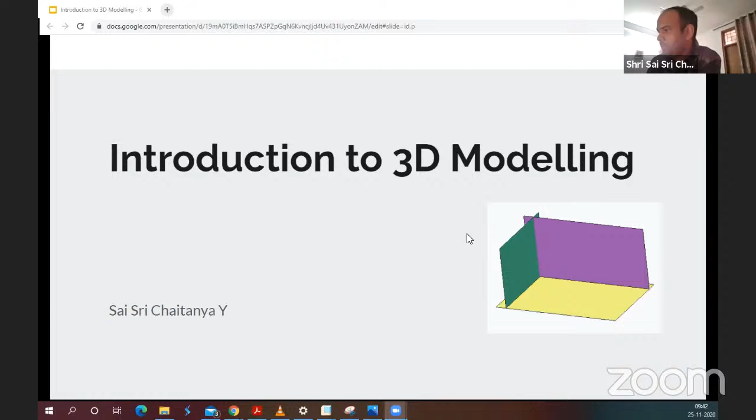3D modeling - what we know is from movies to manufacturing, 3D modeling is incredibly useful. There are hundreds of different 3D programs, and each has a specific application. 3D modeling allows engineers, designers, craftsmen, or entrepreneurs to flesh out their ideas before they come to reality. Most of the objects you see around you in this world right now were first developed as a 3D design using 3D software by engineers or designers, before they were actually brought into the physical world.

So 3D design is extremely important for the same reason - for engineers, architects, be it mechanical, civil, or architectural, or even industrial designers, and new ideas that are drastically coming up. We know there is no relation with the degree associated when you want to be innovative, so this is a helpful tool. Many people use 3D CAD programs to design things before building them - it's being done all the time. By the basic definition, it is the process of developing a mathematical representation of any surface. Surfaces can combine to form a volume, they can combine to form a solid, which can be inanimate or living, and something that can be visualized in 3 dimensions.

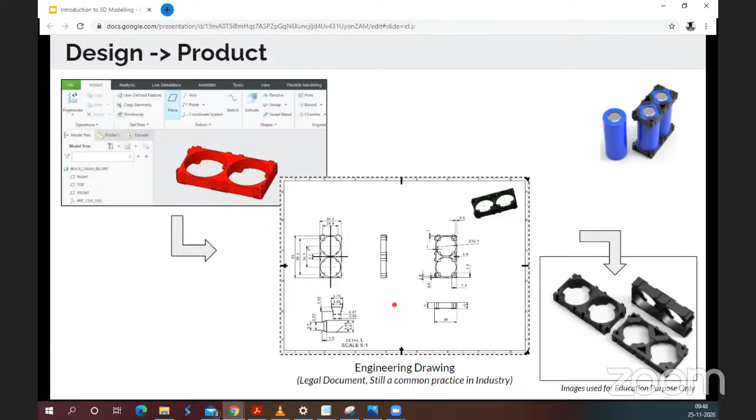So this is typically how design takes shape into a product, right? We imagine that for today's generation, when they pick up a component or something, they know that there is something going on by the design. So there are some people who are doing these designs, and there are people who receive these designs in the form of a drawing or some kind of input, and they manufacture it and bring it to the real world.

So what you see in this picture is, let's say, a battery holder. This was a small project that I was working on with some of my colleagues. On the top right side, you can see the application of it. These days, electric vehicles are quite popular and getting more popularity. So this is a battery holder that goes inside your electric bike or a scooty.

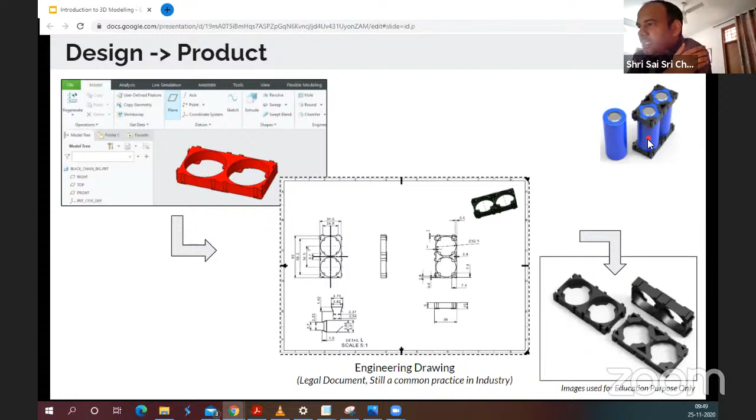So there is a stack of cells that is put inside. So what we see is someone made the 3D, and we have an engineering drawing. So I am also saying that.

So this is an engineering drawing. It is considered a legal document and is still very common in the industry. The 3D softwares are going to a next level where they want to eliminate having a 2D drawing as well. They want to communicate all the technical information on the 3D model itself. That will take some time, and drawings still exist because when entering into contracts with suppliers and regulatory boards, we want everyone on the same page, and this is a good way to sign off our designs.

So what I want to represent here is there's a big transition from design to product, and 3D modeling assists a lot during this process. You have to interact with the engineering teams within yourself, whether it's simulation, labs, or prototype guys, and also cross-function teams like procurement, manufacturing, quality, and plant, and so on.

So just to add up, the next slide could be a bit confusing. Please bear with me, because some of you may not have, or are still pursuing, an engineering background.

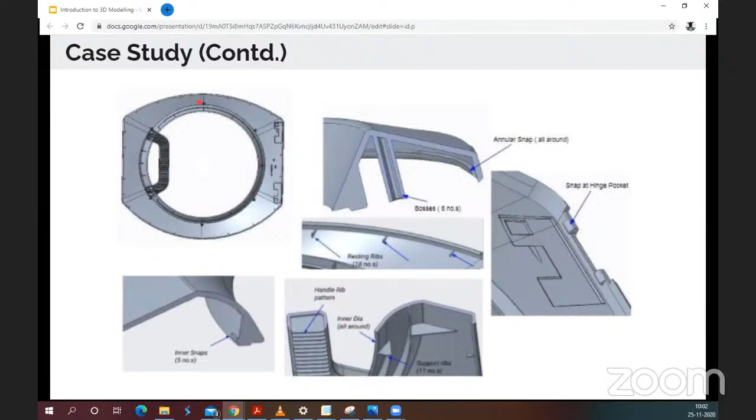So this is a snapshot - please bear in mind we are using this only for educational purposes. Let's say this is a 3D model that was developed, and this is the area where we are trying to develop the screw connections. We know this is going to get a grab load from the user - he's going to grab the handle over here - and we are going to develop some stresses in this region in the back, which is where the screw is exactly located.

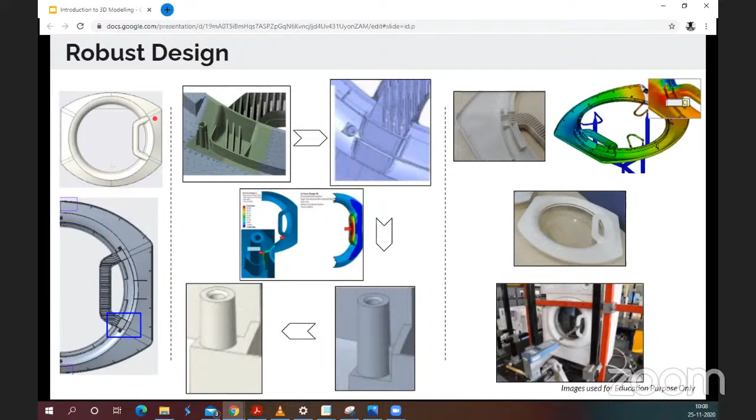The simulation is there inside. It requires a different licensing, but it is also included in the basic pack. What they have done is made these softwares so that they can speak with each other. They have given us some basic simulation features that you can do directly in your 3D modeling environment, especially in Creo. You name any 3D modeling software, it is possible. These days, simulation is possible.

That's it, one question. Okay.

So the next slide speaks of how a typical parametric 3D modeling software looks like, the process, what we do inside. So we are again going back to our topic of 3D modeling. Generally you have a 2D sketch in the start.

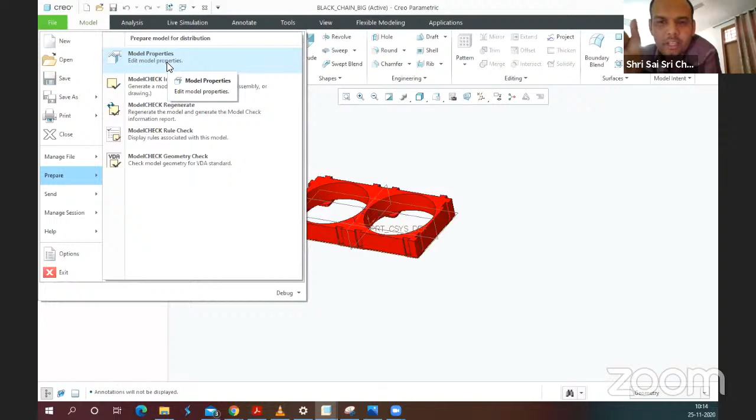Every alloy, if you are speaking of a metal, is associated with a standard, AISI or DIN. If you are speaking of a plastic, the supplier will have their own technical data sheet. If you see, this material right now is not assigned, and by default you get a list of components in the library.

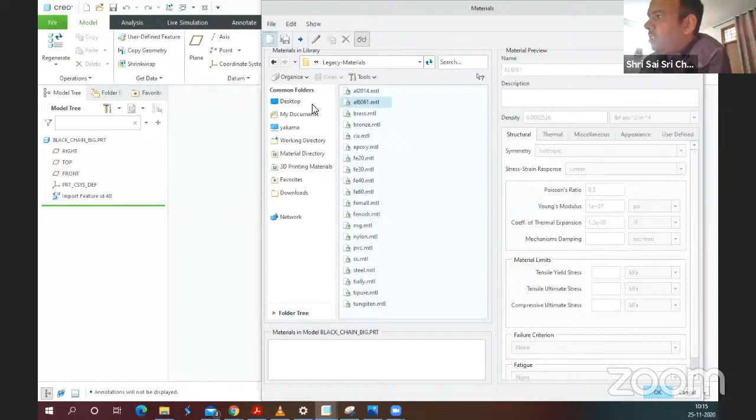Our friend was asking about aluminum. We have two grades of aluminum here. Either we can choose from these two if sufficient, or since you are speaking of a specific alloy with a particular property, you can also create your own new material and assign properties from your technical data sheet. The density, Young's modulus, thermal properties, hardness, miscellaneous like bend factors - all of these can be defined, saved to your library, and applied to your model.

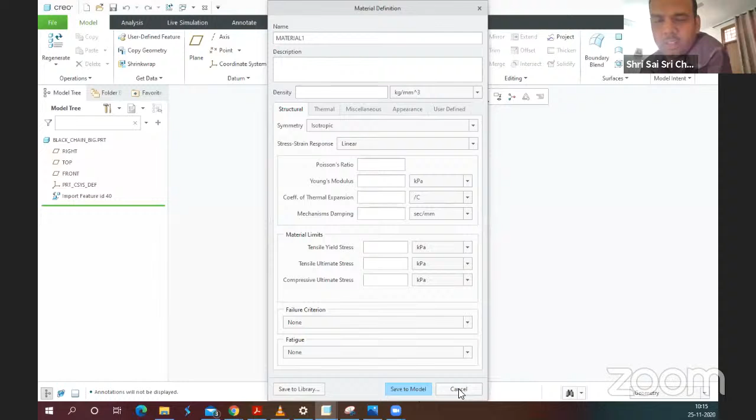Let's say in this case I know this is a plastic part, let's say I give it as nylon. So you see nylon's density - right now the units are coming in terms of pounds. We may want to switch it over to MMKS, the metric system.

Yeah, so it is possible. Whenever there is no material defined, you generally seek the material data sheet from the supplier, or look at the standard, and you are able to create or replicate those properties in your 3D modeling environment.

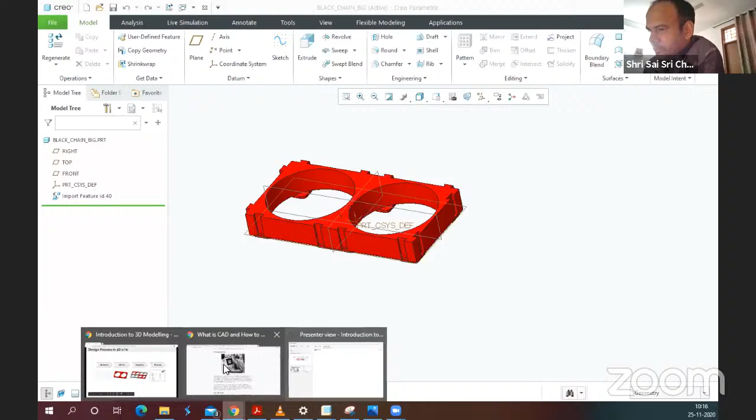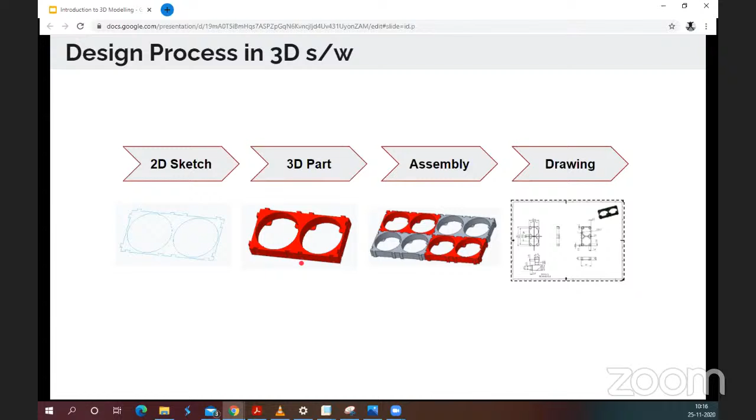So this is where it's going to get a bit more detailed now in the session.

I'm trying to replicate what elements are involved in a 3D modeling software. Part of the reason for this session is to make the audience aware of what kinds of tools are available in the field. This isn't software specific. The environment, aesthetics, visualization, or UX may differ, but the elements remain the same. Some options appear forward, some go back, but the language you speak will always remain the same.

Before we start a 3D modeling software, when you say file new, you get these kinds of options. On the left side, this is how it looks in Creo, and this is how it looks in Autodesk Inventor. You can create a part, an assembly, or directly start with the drawing. In the drawing, you can use sketches and start making views, projecting side views or front views depending on the need.

Typically, what kind of extensions are there? For a part we have .prt, for an assembly level we have another extension. What is a part? It's the geometry of an individual part. We can also create a sheet metal part or a part model at this point in many 3D engineering parametric softwares.

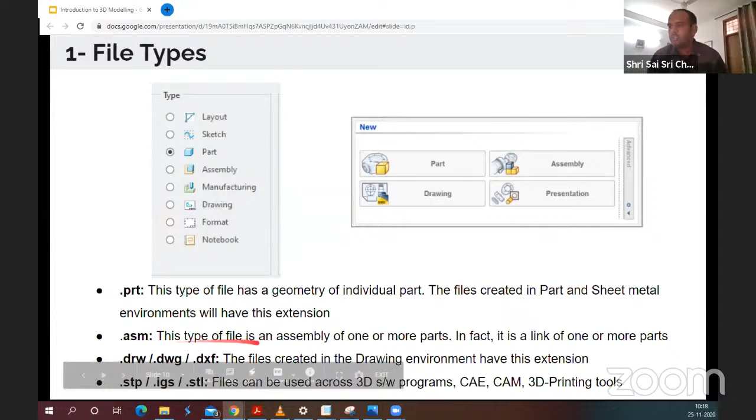Next is an assembly, which is .asm kind. Typically this is an assembly of one or more parts - in fact, it's a link of one or more parts. Next you can see drawing, which can exist in .drw, DWG, or DXF files. The files created in the Drawing environment have this extension.

Last, let's say you're developing a component which uses screws and also needs standard screws, nuts, or bolts. These are standard components already available in the market - you can pick them off the shelf. Suppliers, along with data sheets, these days let us directly download 3D models from them. As an individual you have to cater to all industries irrespective of what 3D modeling software your organization uses. So you have formats like .stp and IGS, which are directly downloadable and importable into your 3D software.

I also know the industry works across platforms - say, Creo to SolidWorks - you want to transfer a model. So what I do is export the model I made in Creo as a STP file or IGS file and share it with a colleague using the other software. These days they're also developing interactions where they can directly use the core .prt file and import it into the other 3D engineering software.

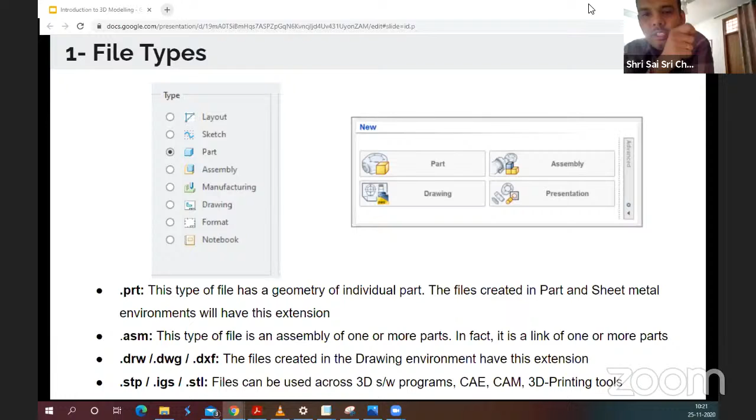Coming to the porous aspect, this is also getting popular in additive manufacturing. You do a normal modeling and assign it density. When going for 3D printing, the conversion software has an inbuilt facility that can make components hollow or porous, and build them in layers in that format. For something like a bone, you might have to start slice by slice, but you could also address the same issue by first building a normal 3D model, assigning the density of the bone, and then exporting it into a software where you can impound properties like porosity. But yeah, good question.

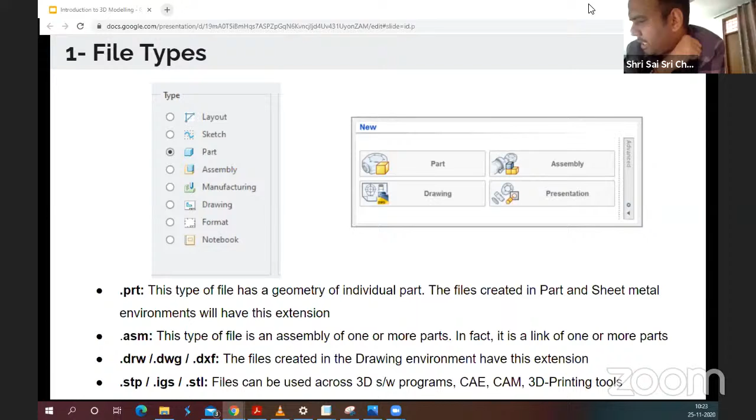So going forward, I want to also give you a fair representation of the software whenever you open it, how it looks. This is particularly the Creo environment, but the options may vary when you are using software like CATIA, SolidWorks, Solid Edge, or Inventor. You always have a graphics toolbar with the 3D model, a model tree which captures the feature history, and the toolbars with different tools. I'm going to cover these in the upcoming slides.

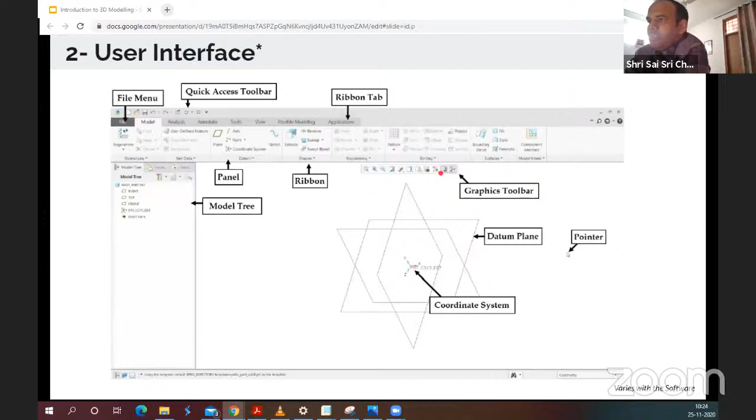It allows you to view, edit, or document your CAD files. The 3D model itself sits in the center of the environment, and the tools you want to use to manipulate the files—let's say you want to add a radius, add a chamfer, or cut—are all located in this window. When using a different program, the tools may be in different places, but we will go through the most common tools in the demo.

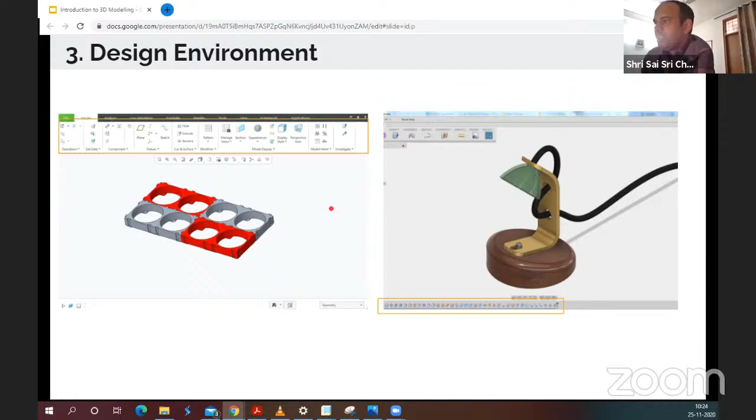Next is the viewing tab, typically also called a graphic toolbar in Creo. It has the commands that allow you to zoom in the model, rotate the model, or change the view of the model—you want to orient it in a specific view, say front view or side view. All these things are possible here.

You can also switch the edges, render the model, hide the solid and only see the wireframe or the edges of the component. At the same time you can switch on the axis, coordinate systems, and planes. I'm going to take this forward because it's an important aspect to understand in 3D modeling software.

Next is the feature tree, also called the model tree. It displays all the types of operations in the sequential order in which they were built. If you see this very simple model, I have created let's say 5 features.

The first feature caters to the top plane, the yellow portion. The second caters to the right plane, the green one. And the third caters to the front plane, the pink one. These 3 planes are actually forming your 3D space.

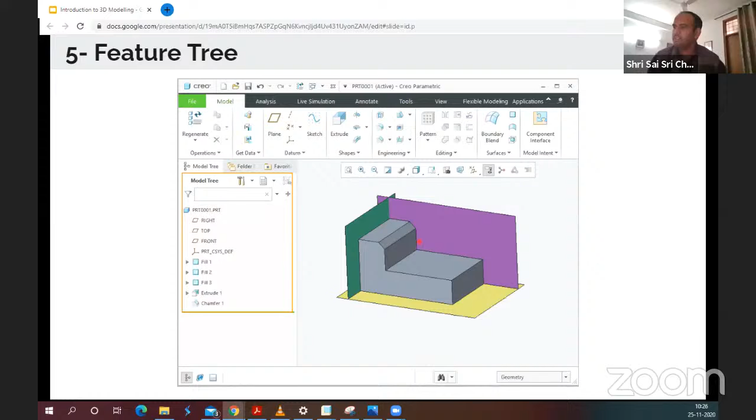You have the axis where the 2 planes get intersected, so you get the x-axis, z-axis, and y-axis, and where these 3 datum planes intersect each other, we have the origin point. This is an important piece of 3D software because we use these planes, points, and axes as reference geometries.

You can locate your part and features with these planes in the 3D space. This forms the 0,0,0 of your component.

The CAD programs work in a Cartesian coordinate system. So any component, surface, or edge can be represented using 0,0,0—the location of this line or point with respect to X, Y, and Z. The reference geometries we create can be used for sketches and also features when designing the part.

Any questions here? This is actually the base of any 3D modeling software, so it's important for us to understand what is a front plane, a right plane, and a top plane.

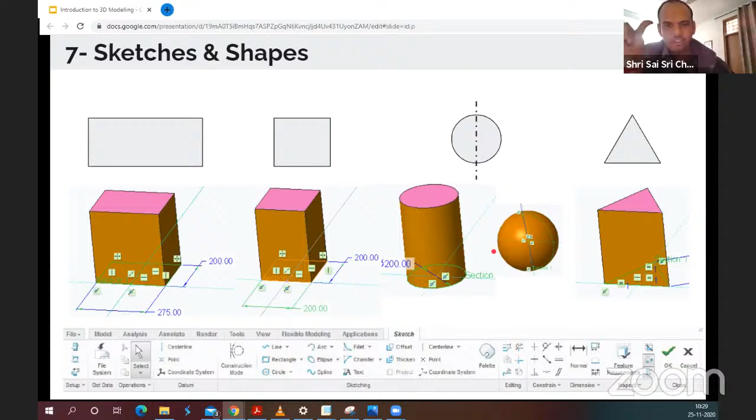Since I'm showing the basic functionality of 3D CAD software to get you started, some programs will differ from others. Unigraphics has built-in solid blocks, 3D solid blocks. In Creo, you have lines, rectangles, arcs, ellipses, some basic features, and also a palette where you can pick standard shapes and use them directly.

Next, we want to understand what is a part and what is an assembly, and what is possible in a part environment. This is common across all 3D modeling software. A part file is the basic component of the 3D software. It represents a single component or piece, and it can be part of a larger assembly.

When designing a part, we can use a wide range of 2D sketching utilities or forming tools in the modeling software to get the desired shape. For example, the battery holder shown here has a variety of extrusions, cutting features, holes, chamfers, and radius features.

Among other things, both have actually started with simple shapes. So maybe I started with a simple circle and a rectangle, and step by step as it matured, we had this finished part in this format, the final design.

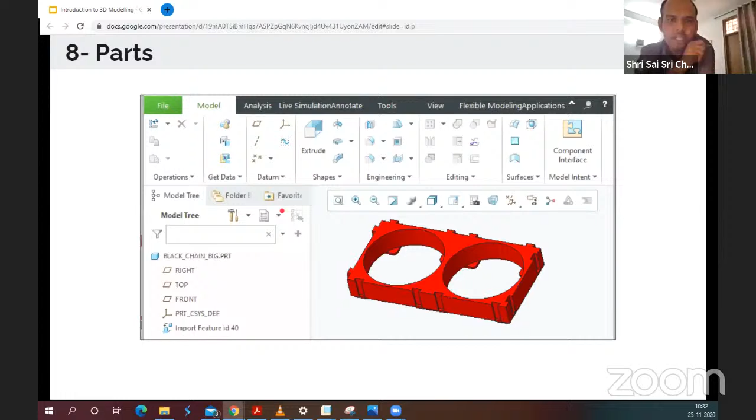Assemblies are 3D files that contain multiple components or parts. In assemblies, you can connect parts together with different constraints that are available. You can make it coaxial, coincident, parallel, radial. There are several options, so you want to just leave it in a specific orientation.

The features still remain common across all the 3D softwares in a 3D modeling software.

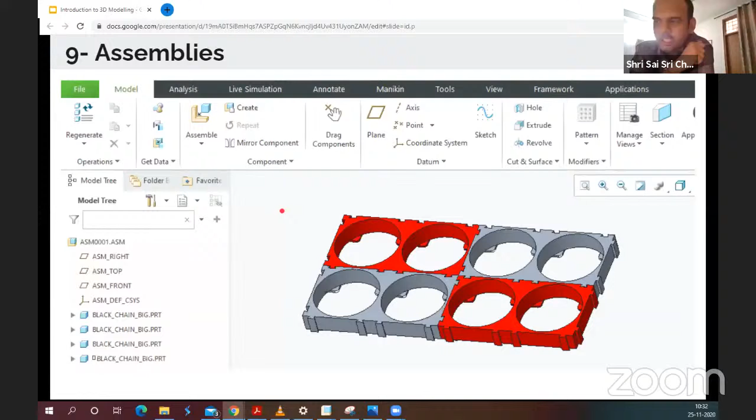I think that was the small snapshot I had to share. I know the session was supposed to be until 11, so maybe I've wrapped up a little early at this point. I will open the floor for further questions.

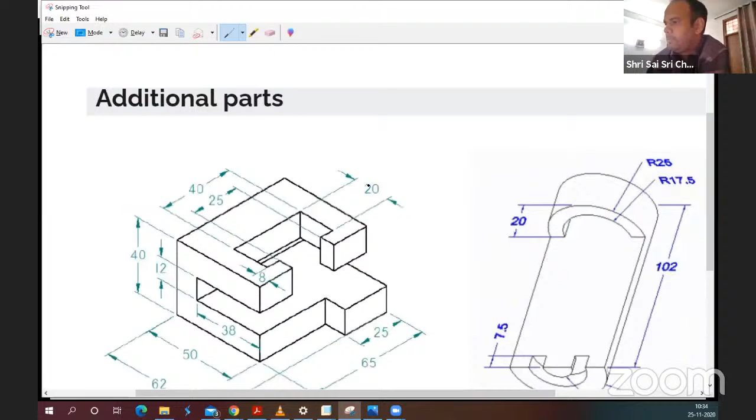So let's take this part. Let's say there are basically two parts, have 1 and 2. Let's see if time permits, I will quickly show you a demo, and please keep it open if you have any questions. So I'm going to follow this 3D model and show how we can build this. Let's get into it, let me close all the files so that I can show you.

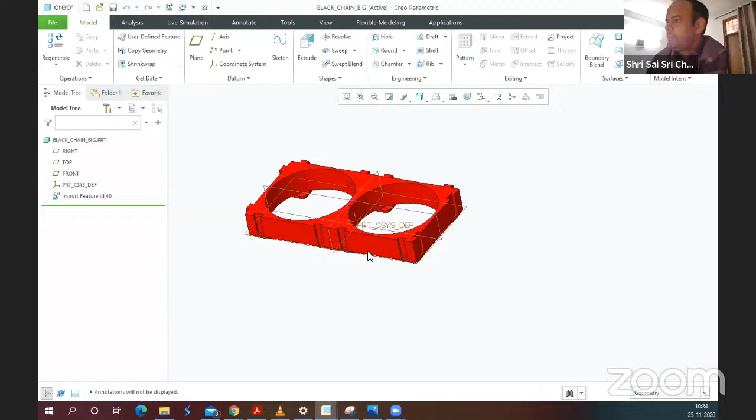Yeah, so this is how a typical Creo window looks like when you launch it, okay.

Before starting a project or designing by yourself, it's good practice to set a working directory so that all your components get saved to the same folder rather than scattering here and there. Let me name it exercise 1, and I set it there.

I will use the metric standard, MMNS part solid. And yes, here we go. So what you're seeing here is a block, a solid block, in which there are several cuts.

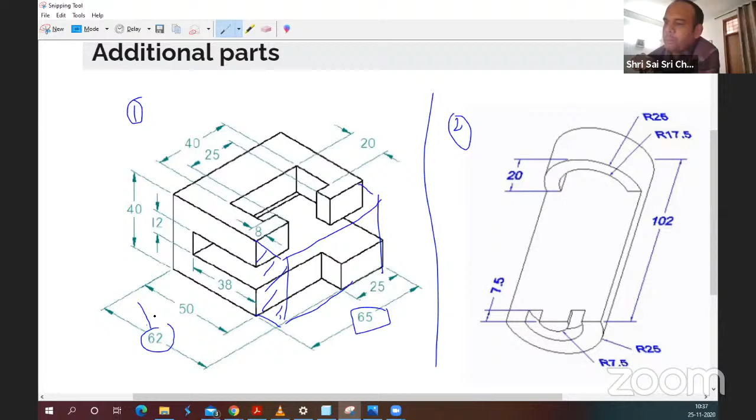So either you can start building it is up to the approach of the designer. If he knows that there is a standard block available in the market, maybe he can already start building up first with the actual block shape and then start removing it. So let's say he knows there is a 62 by 65 block already available in the market, which the supplier is going to use to machine it. So it is also a good approach that we first build the block and then do the machining or simulate the manufacturing process. Let me try first building up this 62 by 65 block.

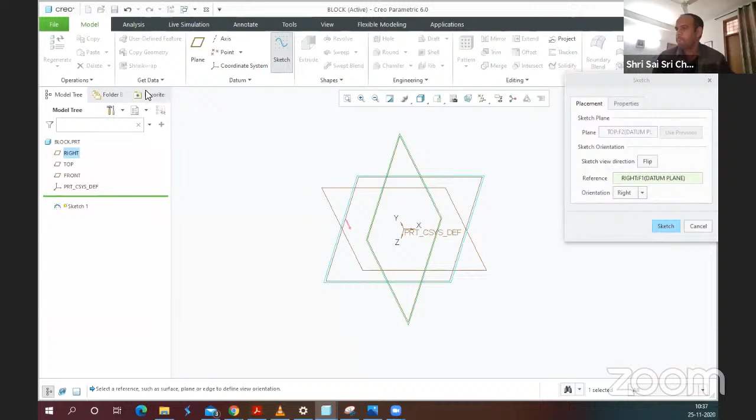So I select sketch, and I have selected the top plane. So if you see this, we have this as 62 by 65. I will also try to turn off.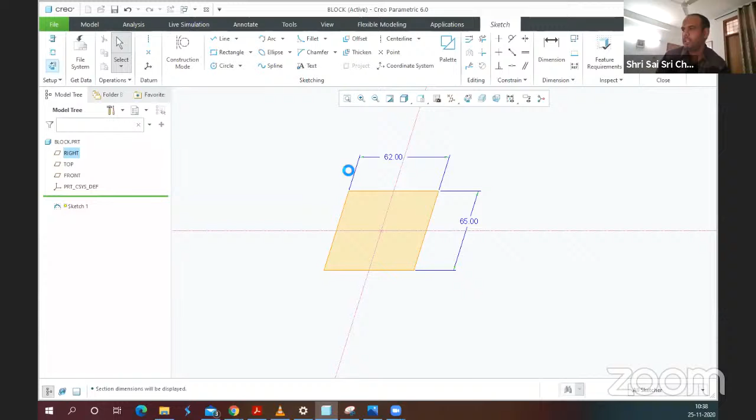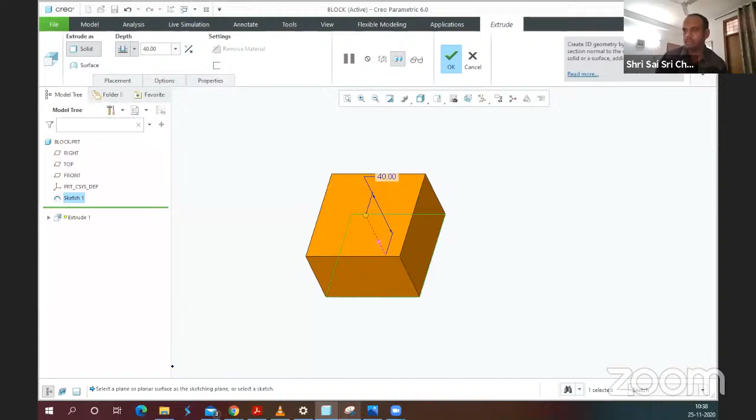So this is a 62 by 65 thing, and now I have to also extrude it in this direction by 40 mm. This is how typically your sketcher window will look like. So this is your top plane, and once I am out of it, I select an extrude. It is asking me how much I should extrude it, and this is good, right?

40. Yes. So next, what we know is there is this cut feature over here, which is getting removed from both sides. So this is a 50 mm cut.

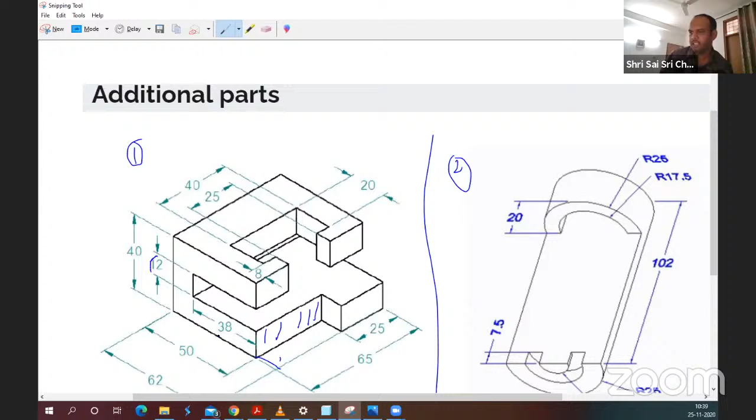And before that, we also see that there is a 12 by 38 window, where there is no material at all, and it is symmetric against both sides. Maybe we can take up this. I will take this window. I will use an extrude.

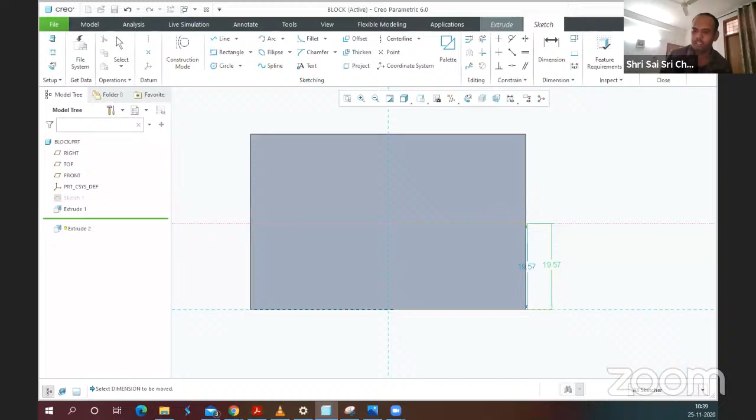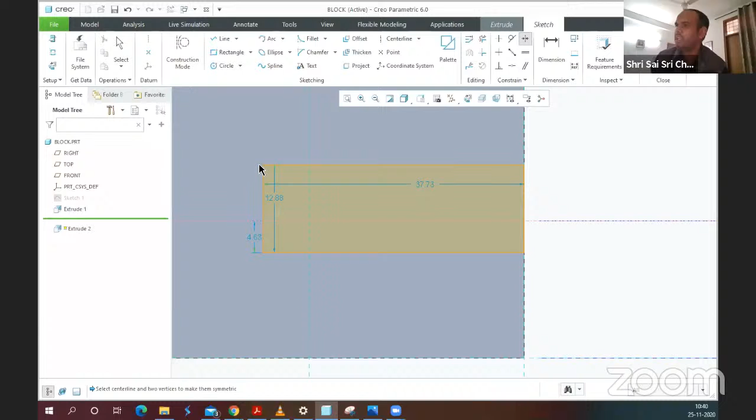So this is 40. I'll give it as a center line. I will again take a rectangle that is symmetric around this axis. Suppose this was not symmetric, there are many constraint tools. I can again demonstrate that. So let me say I have made it in this format, but I want this rectangle sketch feature to be symmetric along this center axis. So we have constraint tools, which are also very common across all 3D modeling softwares. And here you go, I have made it symmetric.

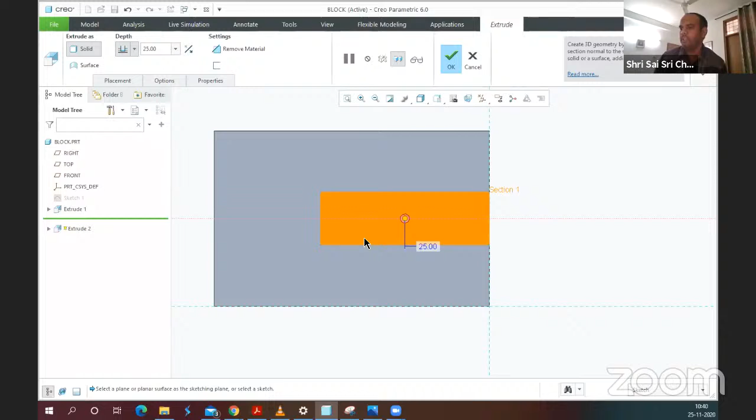Now we need to get the dimensions, it is 12 by 38. So now it is actually showing me that it is adding material, but we want to remove material, and it has to be in the opposite direction. So I remove it in the opposite direction. It is asking me the depth of it.

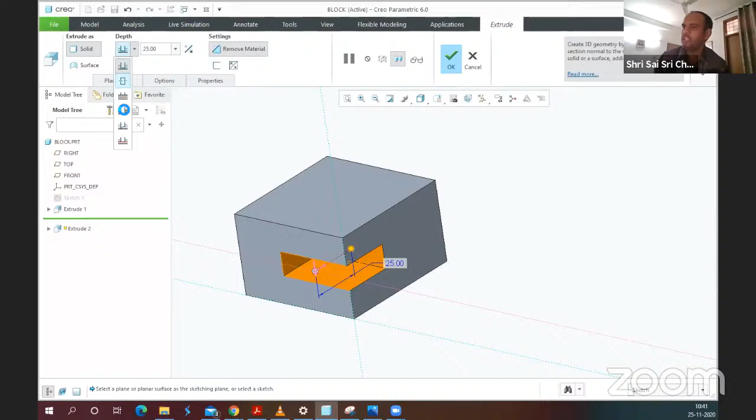So maybe I can, we have several options. Is it symmetric, do you want to extend it to a certain surface, do you want to extrude through all to whatever is coming outside. So maybe I can select extrude through all, and it is giving me this cutout over here.

Next, so this is also done. Now we have this T slot, and we are interested in this particular T slot, which is 40 by 25 width-wise cut, and we have total depth of 20 by 8. So I select this feature, this is where it is, and again use an extrude command.

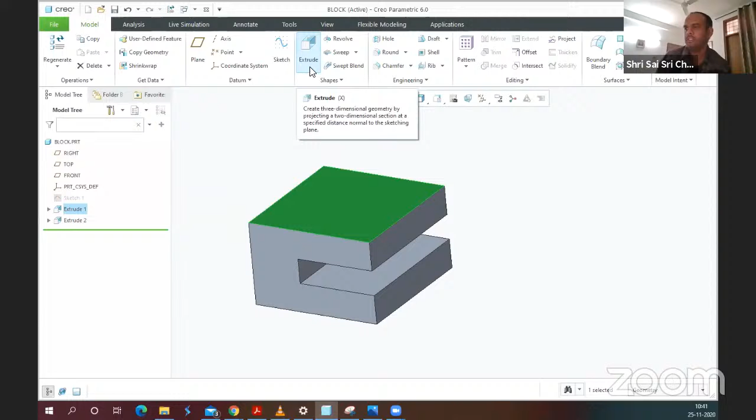So you see it is already auto snapping onto the lines. In case you don't want it to auto snap and you want to define it, you can go to references and select those edges that you want to pick as a reference to your newly created geometry.

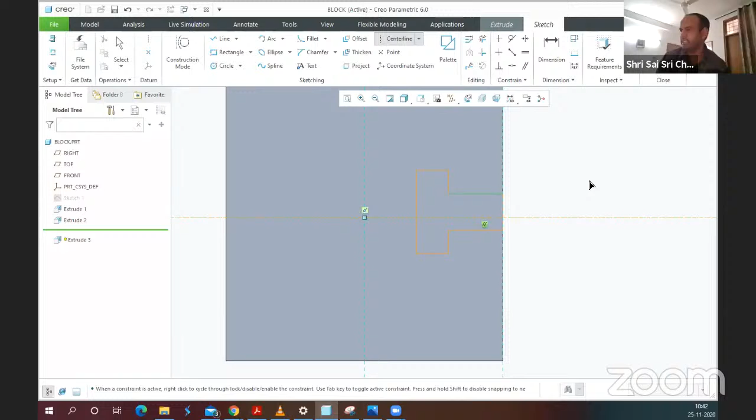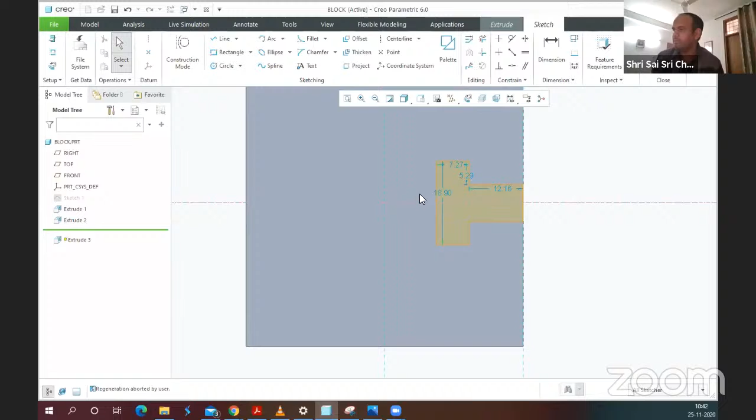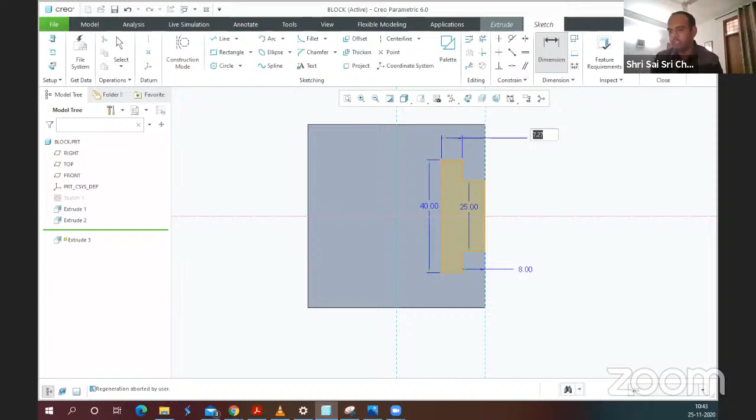We define this, this is 20. Let's go back to the drawing. 40 by 25, okay. And this is 20 by 8. This is 8. And this is 20.

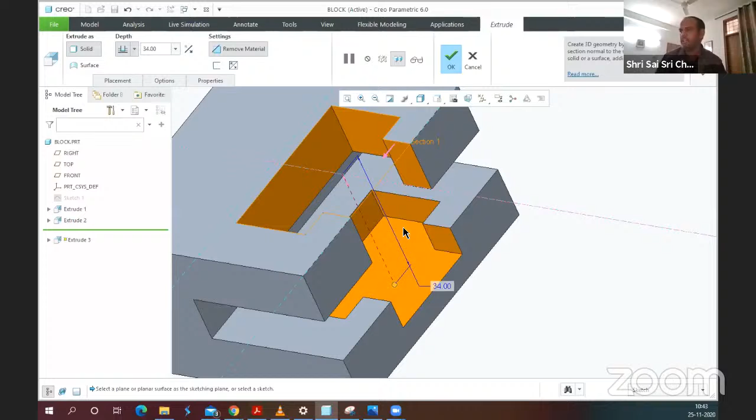So now again we want to remove the material. As soon as I switch the direction, it started removing it. But now in this case we want the removal of material only until a certain point. This length also was a little, it is not 62, it is actually 50. We may also want to remove this material over here that is getting extended right now in our component. Let us also consider that, so that is 50.

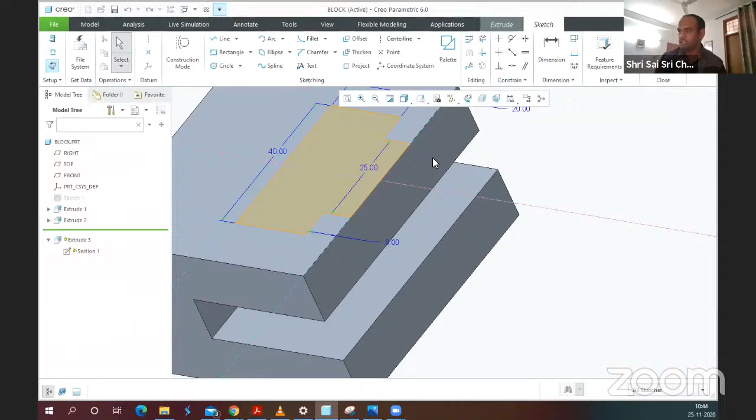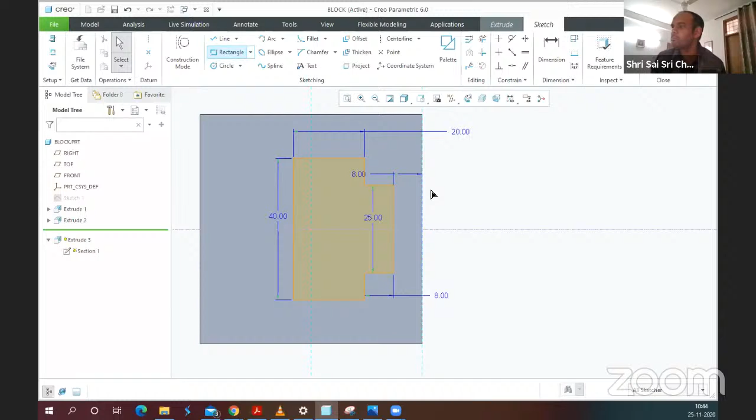Okay, so let's say and now I will use the delete. It will delete this portion. And you see, as soon as it is forming a closed loop, it also highlights itself as a closed loop, an orange translucent surface.

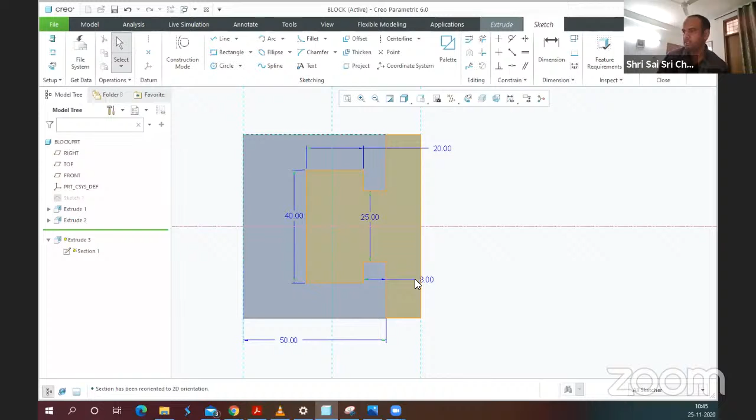So we want this to be ideally 50. Okay yes, 50 or 50, yeah 50. So this is 50, 20, 8, 25, 40. 50, 20, 8, 25, 40, right?

So again it is asking us up to what surface. This time we have the option also to go up to a selected surface. So I will take it and say extrude until this surface. And if you see, until that particular surface we were able to cut.

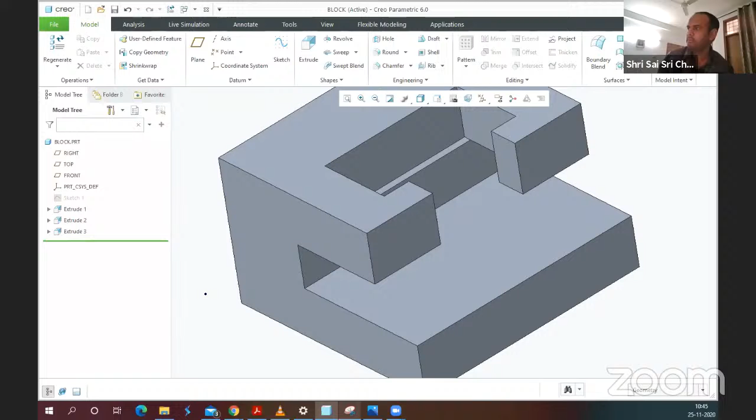I think there has been some mistake. 38. Okay, let's go back to the drawing board. I believe I think we may be good there.

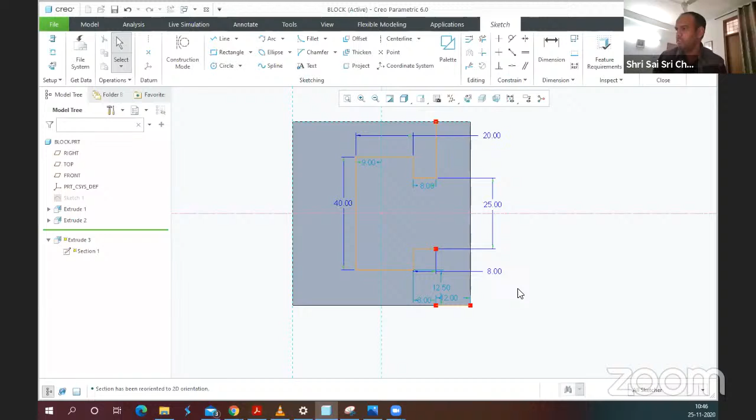So this is a coincident. I want this point to be coincident with this, to be coincident with this. Okay, yeah, so it would appear that the length is fully covered. And next, let us take out this portion, this small rectangle portion from here, and that would suffice our component.

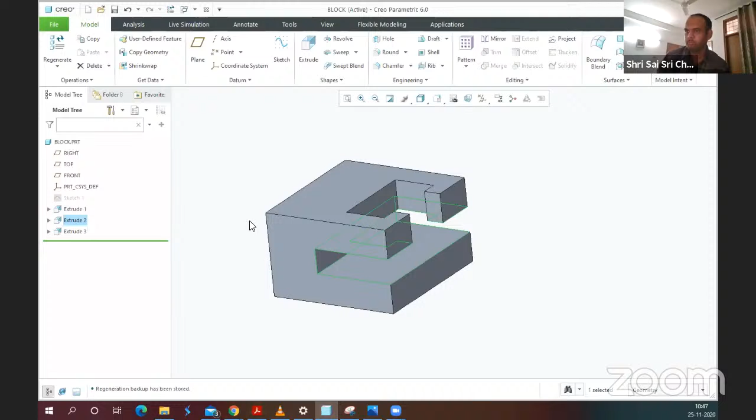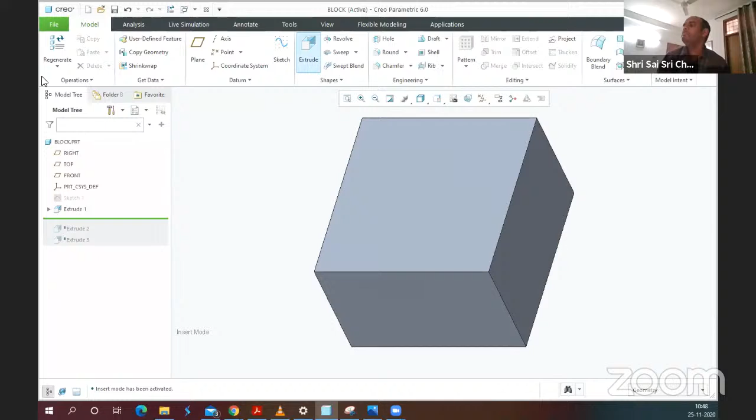38. Okay, my bad, I have made a mistake here. So after this extrude, we want to remove this portion of material. This 8mm material we want to remove from here. So this is standing at 50 and this is 25.

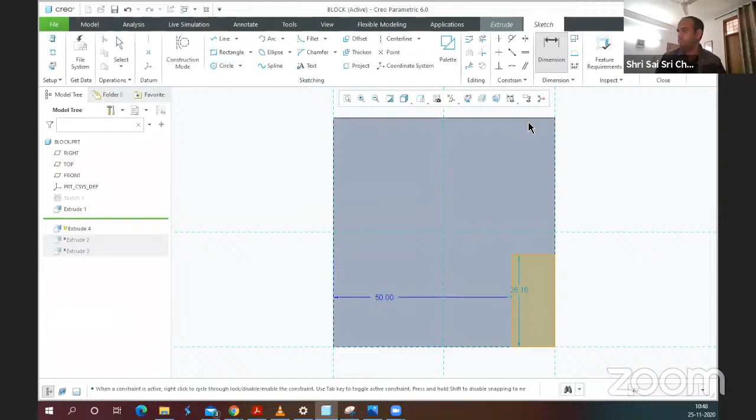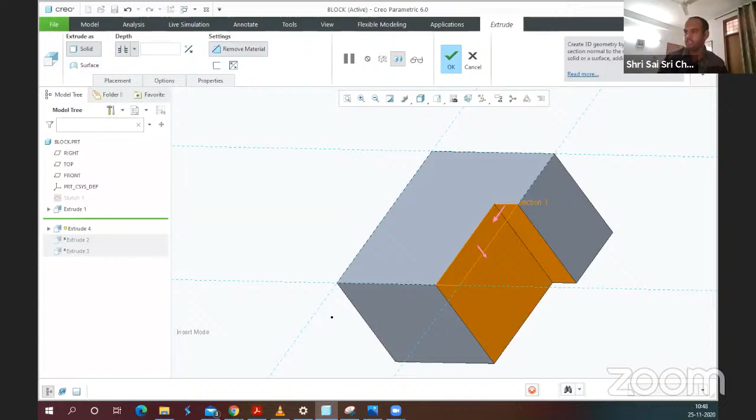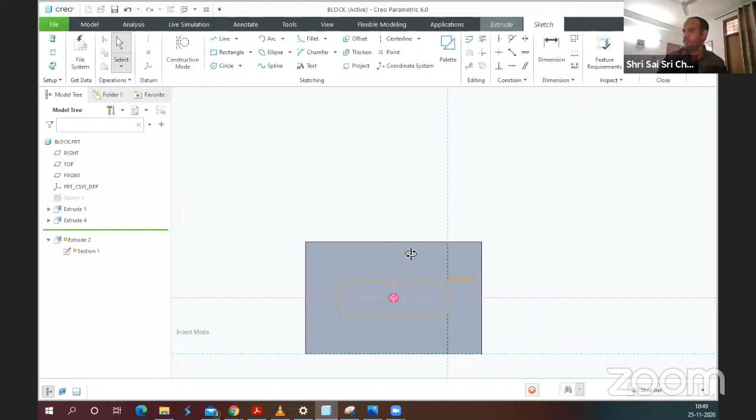Say remove, I say through all. Okay, yes, this is good. And then I go for the extrude. So this extrude. So I can also change the references, change and replace it with this surface so that the section is moved a little back. And at the same time, since this is a throughout section, we can also extend it.

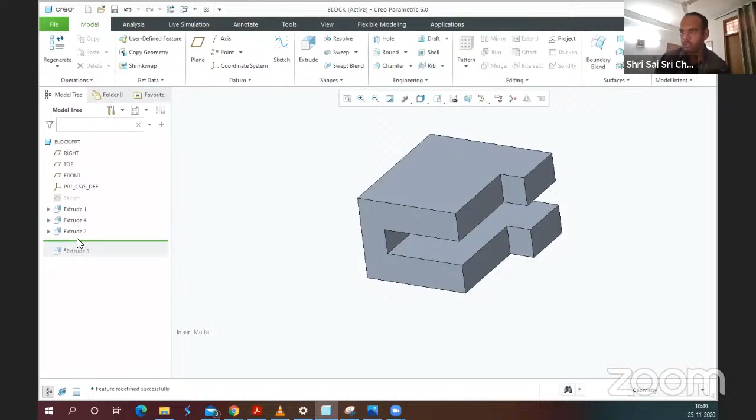Okay, so next we are coming to this. But before coming to this feature, we also want to remove this edge over here on the top. I will use a constraint to put this point on this vertical line. You see it has taken up, but still we want to select it to the respective surface. Yes.

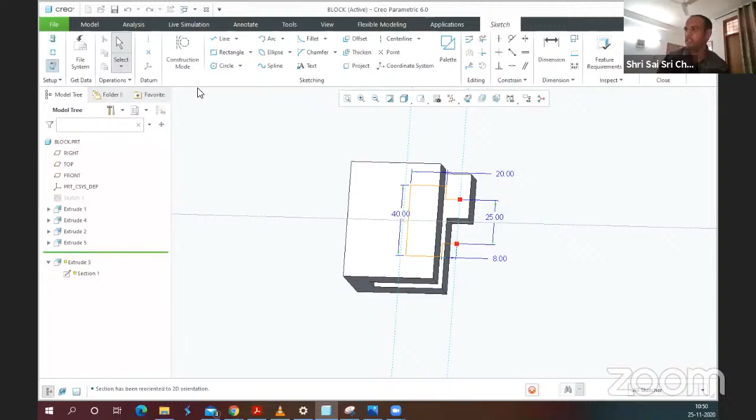And here we want to replace this surface with this one here. Okay. Yeah, there we go.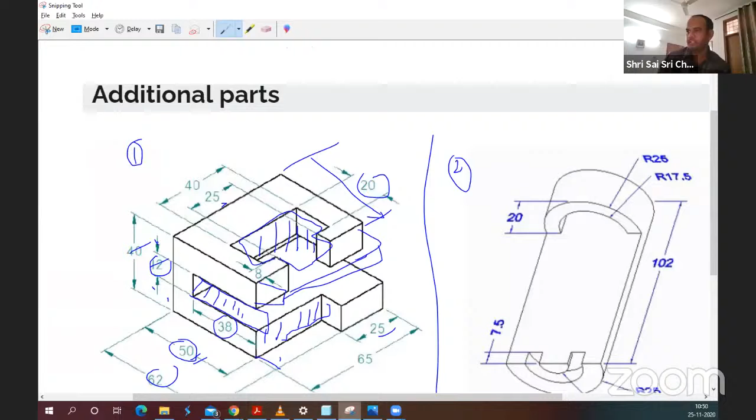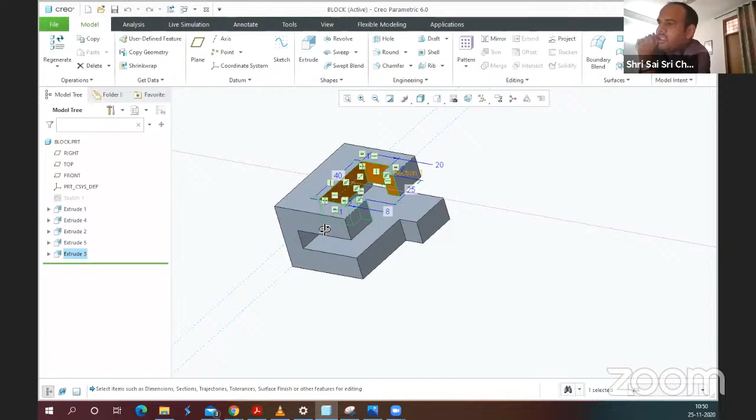So this is the 3D model what we are able to build. Here if you see we have majorly used one common command, that is extrude. I think the entire features we were able to build with extrude command. We also were able to remove material with the same command. This is a very commonly used tool across all the 3D platforms, for making a T-slot or this thing. So any questions here? I'll keep it in the default state.

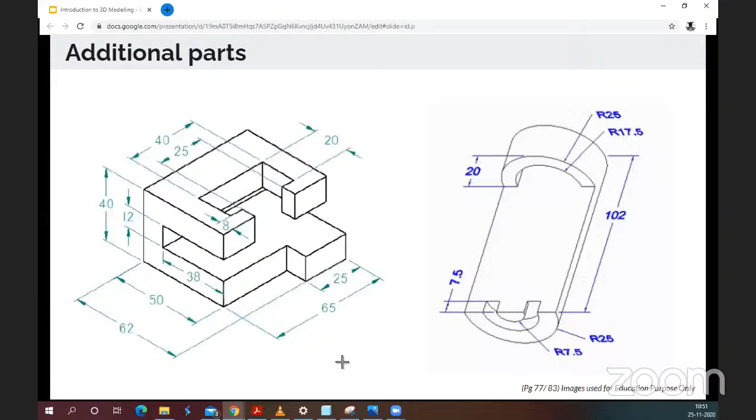Chaitanya, two questions are there. How to simulate a player and his tennis racket for my AR game? What is the software that can be used for this task?

Okay, so AR definitely it is not my cup of tea there, and I almost forgot my tea. So maybe I cannot help there, but mechanisms or animations, that is possible in your 3D software.

Let's say for your second question - you have a mechanism, a gear mechanism, like a planetary set of gears. So you have a drive shaft that is driving a set of gears. Those kinds of animations you're able to do in the 3D modeling software for engineering parts.

But if you're speaking about, let's say, a tennis racket for a game, then maybe you have to rely on animation software. Like I said, we are concentrating this session on 3D modeling software and not on the animation aspect. And for AR, frankly, I'm not the right guy to speak with about that.

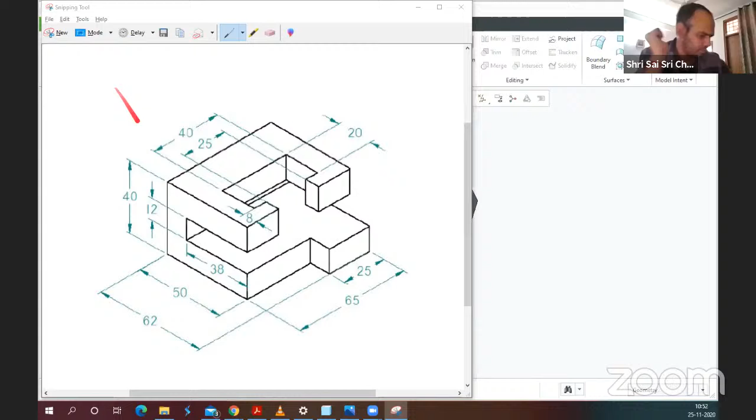Chaitanya, second question: sir, we are planning to use Blender or SketchUp for teaching AR VR applications to our students - is it a wise choice? I have never heard of Creo in that context before. Is there any relation between Creo and AR/VR? I know that PTC is coming up with AR and VR tools recently, but that is a separate set of tools apart from Creo.

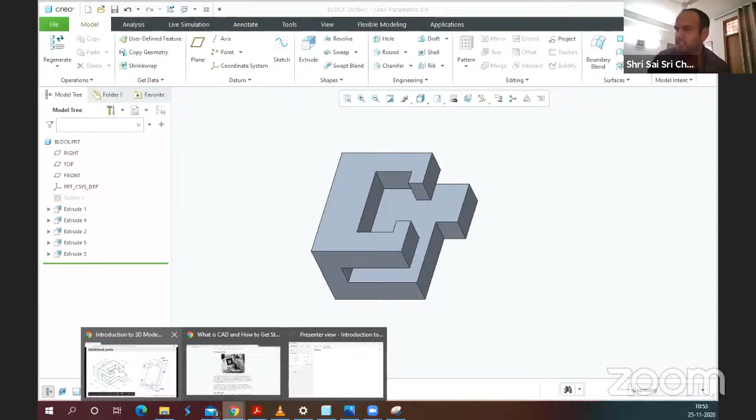So, again, my field of experience totally lies with 3D modeling software. For any AR or VR platform application, I can definitely say that Creo may not be the right tool at this point, because Creo we are majorly relying on for engineering parametric 3D models - that is one of its strong points.

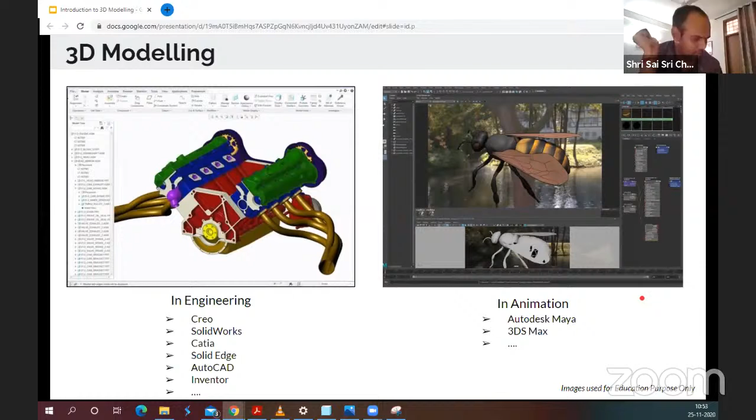I also learned that you had a session from PTC on AR and VR, so I think those colleagues can point you in a better direction for this AR VR application.

Chaitanya, one more question: once they do this 3D modeling, can they superimpose it on a 2D image or a 3D image later on? Yes, definitely - something like a virtual overlay, if they superimpose it onto the image they want to display.

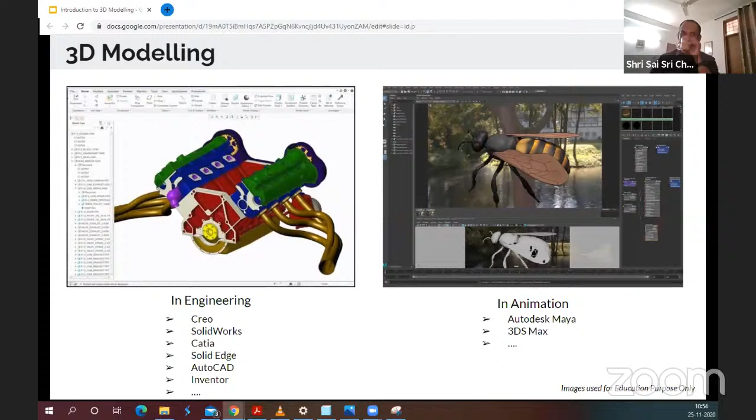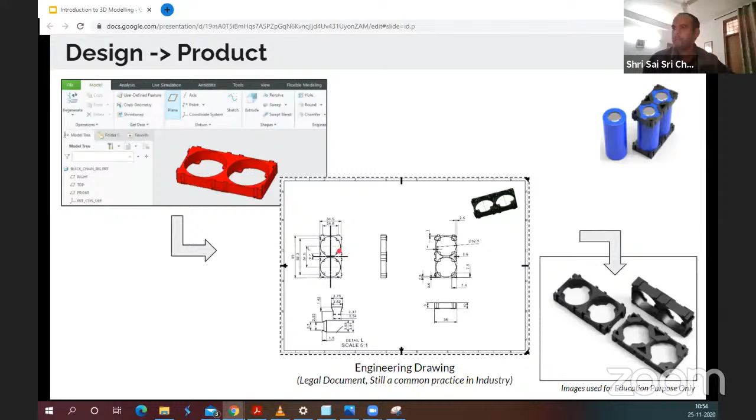I can actually give you a very good example. We were using it in General Motors - there was a team itself which we used to call measuring point systems. So the 3D model is the theoretically exact representation of what the designer wants, representing virtually the exact 100% accurate model.

But once the components are manufactured - let's say a stamped or sheet metal component done in a press - it comes out, and now there are two ways: either you measure it the conventional way, getting heights, or, if it's a very complicated shape or 3D surface, you use another method.

What they do is scan the component and generate a cloud of points. This cloud of points is transferred into the 3D modeling software, or you can directly import it as a step file. Then in a simple assembly, you superimpose your 3D model and this cloud of points, and you'll know exactly where the component meets the dimensions, where it deviates, where there's spring back, or where there's an out-of-contour line. These things are quite common in the industry.

So this is again the laser scanning technique. If you guys had a chance to visit IMTEX in Bangalore, held yearly at BIEC - Bangalore International Exhibition Center - they showcase many kinds of advanced technologies popular in the industry. They are able to scan a human body and bring it into the live environment of a 3D modeling software.

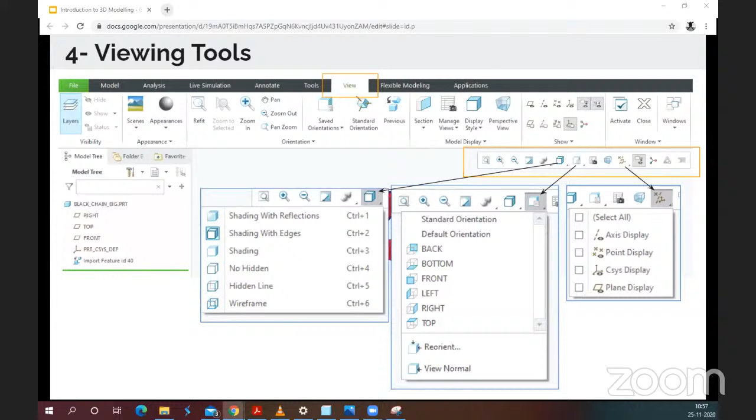Just to give you a glance of what we are going to do in the next session - we are going to create a C-clamp, design the part. We already have the part drawings developed, so we are going to do an assembly of this, just for the interest of the participants.